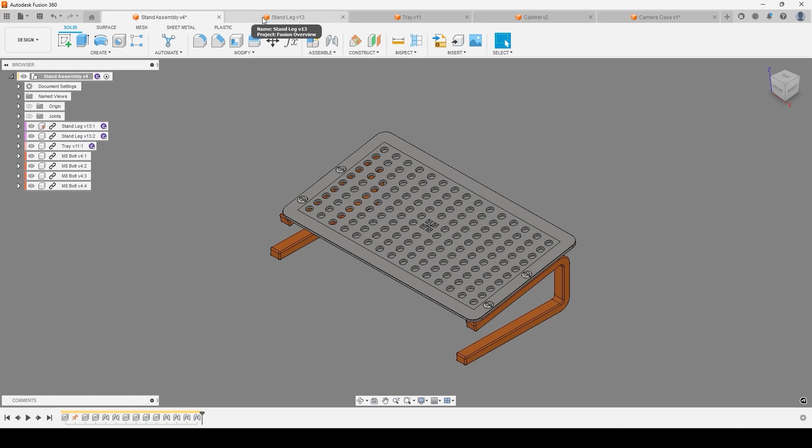So today I'm going to be looking at how we would manufacture each of those individual parts. Looking at the stand leg, this is, in our case, a plastic part. We would potentially want to go and either machine this out of a solid piece of plastic, or we're going to be looking at today the ability to use the additive manufacturing process inside of Fusion 360.

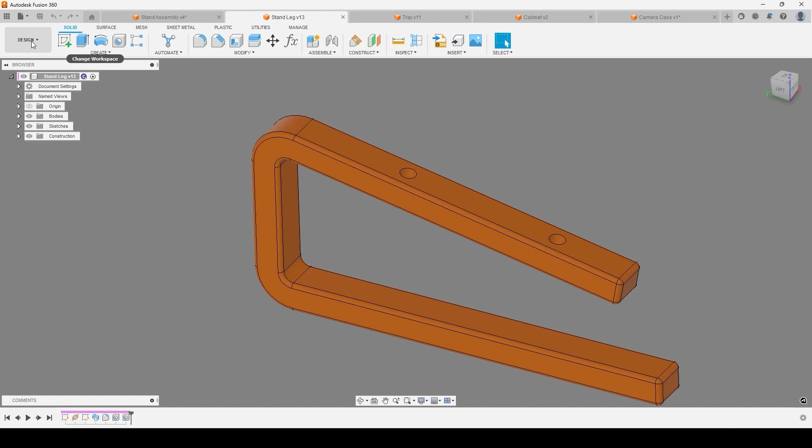to actually 3D print this particular model. So going to the manufacturing environment inside of Fusion 360 is as simple as changing the workspace. We design inside of the design workspace, and we manufacture inside of the manufacturing workspace. So just switching to the manufacturing workspace, you'll notice that my toolbar or ribbon up at the top has new buttons, new tools available to me for this particular workspace.

At the top, we've got milling and turning, which will be our subtractive manufacturing options. We've got additive, which will be the 3D printing. We've also got the ability to do inspection and fabrication as well, which we'll get into a little later on.

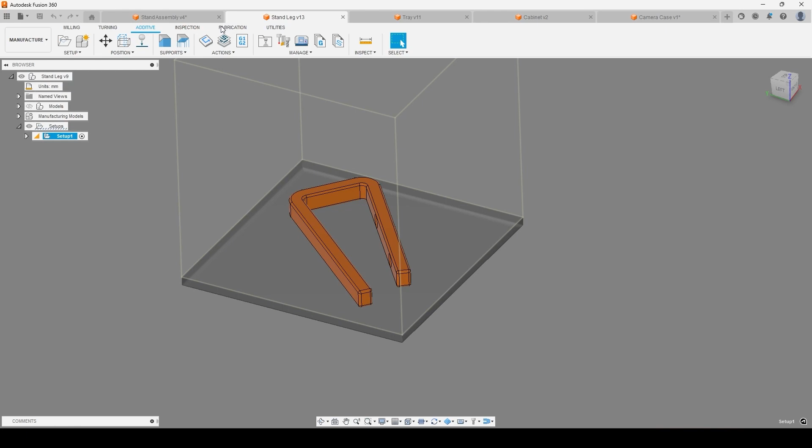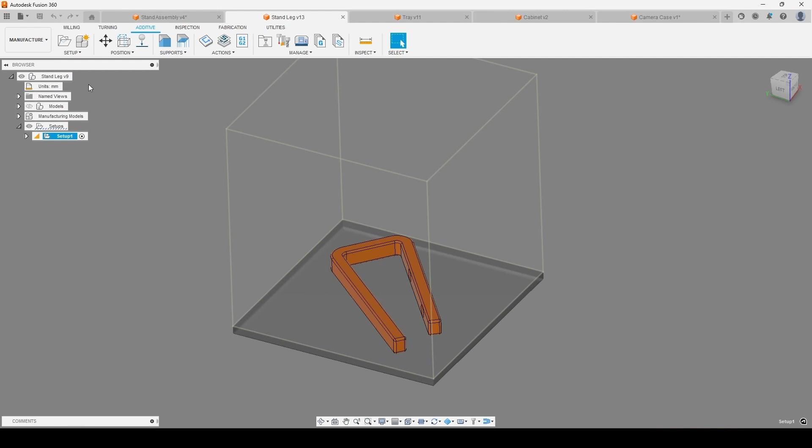So for this particular part, what we would want to do - I've already got a completed version over here, which we can roll back to at a later point. But essentially what we wanted to do inside of Fusion 360 with the simplified interface is we're generally working from left to right in order to go through our either design or manufacture or any other of the workspaces that we have.

So the first thing we want to do is go in and create a setup. This will start to tell Fusion how we're wanting to manufacture this particular component, including the machine that we're wanting to use to print this off.

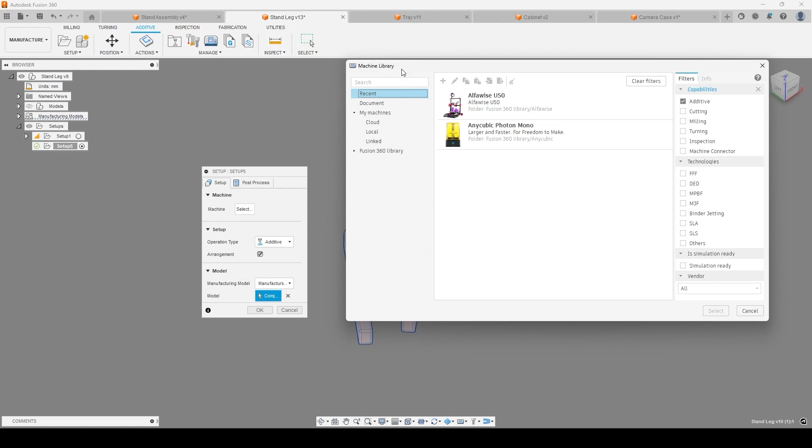Sorry, this has gone onto my other screen. Let me bring it on here. So whichever machine we're wanting to use to print our component, whether it be one that's in our current library or whether it be inside of Fusion 360's library as well, I'll just go for a generic Autodesk one.

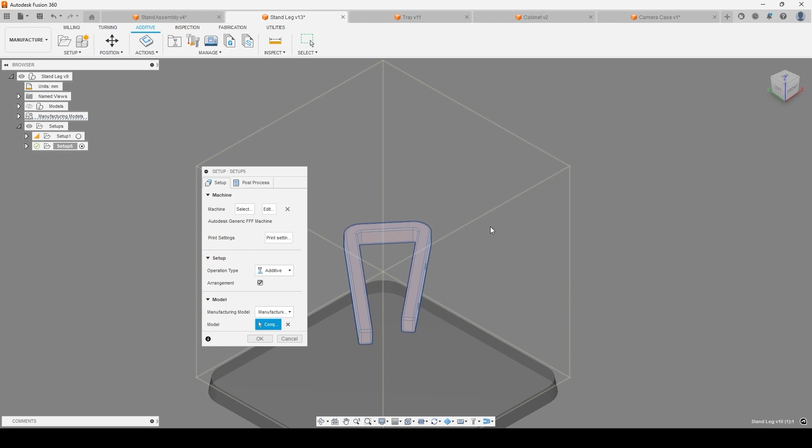I'll go for an FFF on this particular one. This part I've designed as an ABS plastic, but we'll just use this anyway. Go and grab that, okay this, and you can see in the background it's showing me the bed that it's going to be using to print our model.

We can then also choose the print settings. This is where we would go in and adjust exactly how our item is going to print. I can go and edit this if I wanted to, or export this if I wanted to, and adjust exactly how we're wanting to print this, down to the infill, down to the thickness of the outer layer. And all of that is being driven by our print setting library.

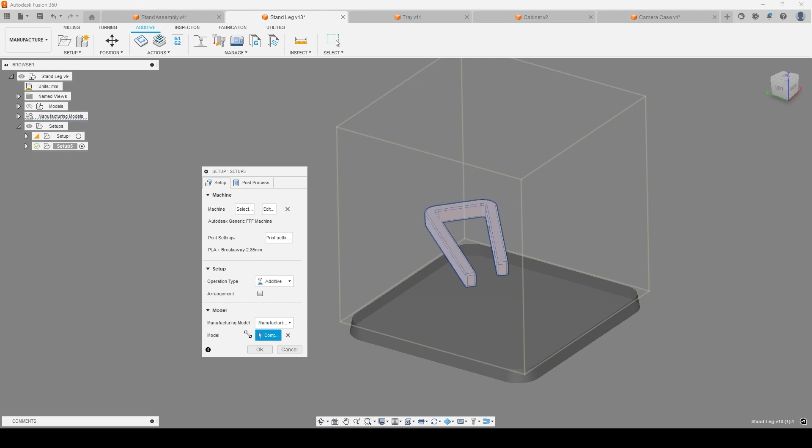We also got the ability to do some arrangement inside of the workspace. So it'll take the volume of the bed, the volume of the area that will be used for printing, and align and orientate our model inside of that area. So we can have it do an automatic arrangement as well. I'm going to leave that unticked for now because I want to adjust that myself and set that later on. Once we're happy with that, we can hit OK, and it will then go and place that in.

You can see at the moment it's highlighting it in red, telling me that it doesn't quite fit inside of my environment or inside of my printing bed. So I can go and position this using the different positioning tools and get it more or less where I'm wanting it to be located.

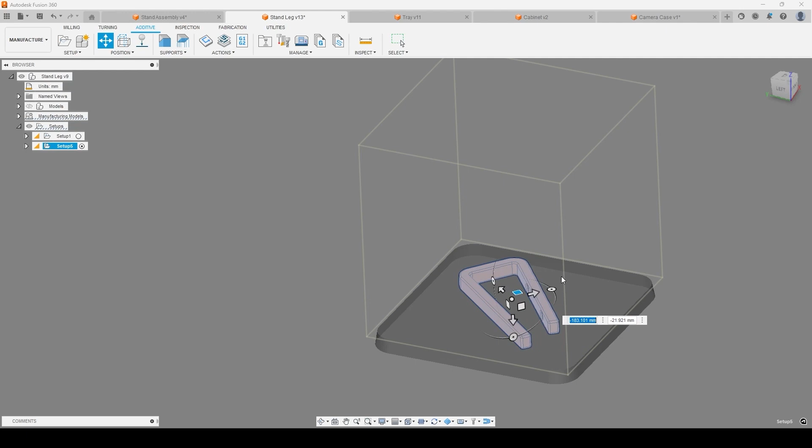Now, because this is going to be having some vertical strain going onto it with the pressure of the laptop or whatever device you're putting onto the stand, I'm going to want to print it in the current orientation so that the layers and the lamination of it is in the correct orientation. So I want to print it on its side as it is currently. So I'm happy with the current orientation of it.

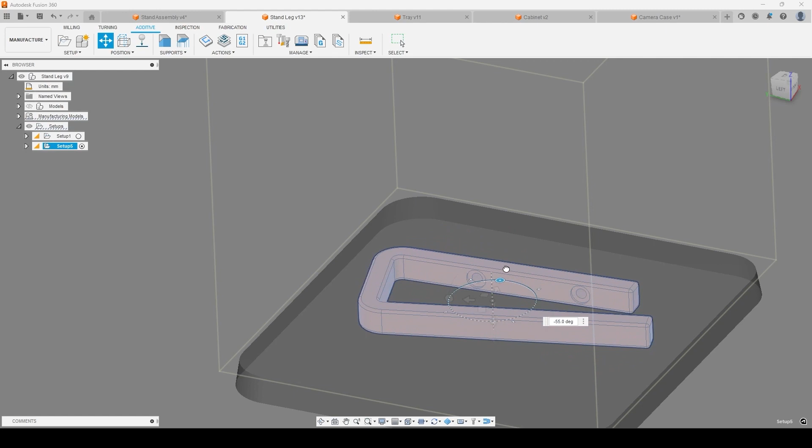Perhaps I could rotate it around as well using the dials on the side over here. If I can grab a grip of it from this angle, you can see we can rotate this in any direction. We can use the arrows to move its positioning, and we can use the squares to rotate it, or move it rather, in a plane, so in two directions at once.

Once we're happy with the positioning of this, we could use other options to analyze the printing themselves, whether we're wanting to minimize the build height to have it as low as possible, or whether we want to ensure that the parts themselves are placed directly onto the bed. We've got the ability to use that inside of the positioning options.

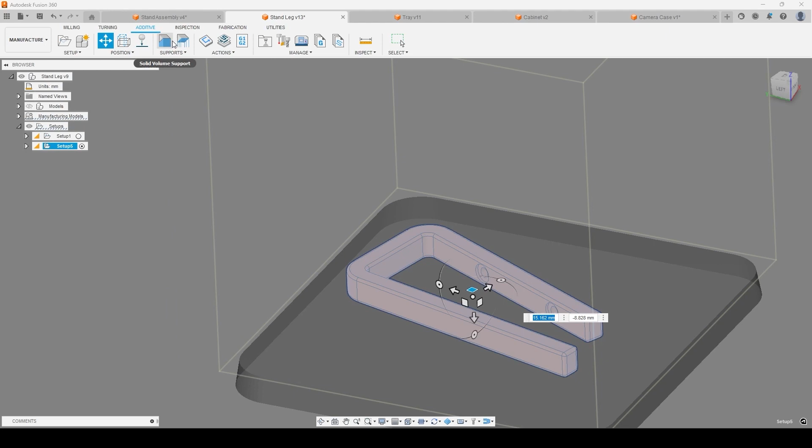We've also got the ability to enable and adjust the supports that are generated for this particular component. So if we did want it ever so slightly up or above the bed itself, just by hitting enter on this and confirming the movement, I can go in and add in some solid volume supports to the bottom of my component to make sure that the entire component is supported during this process.

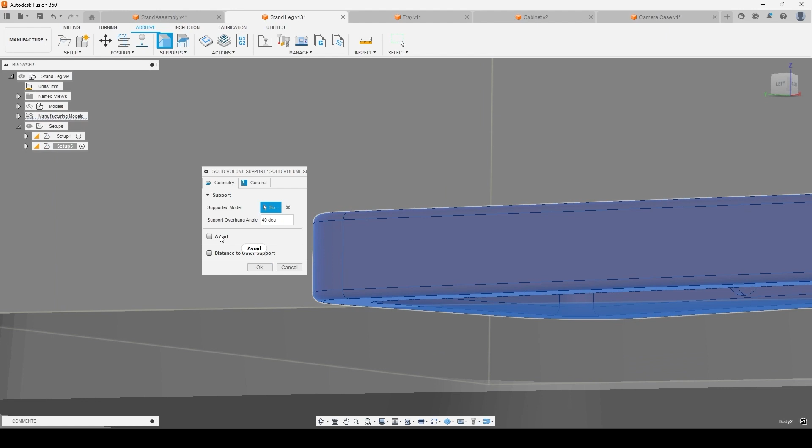We can change the overhang angles. We've got the ability to avoid certain surfaces and ensure that there's a certain distance to other supports as well if we wanted. We've got the ability in the General tab for the volumetric supports to set the top distance and bottom distance of the part as well.

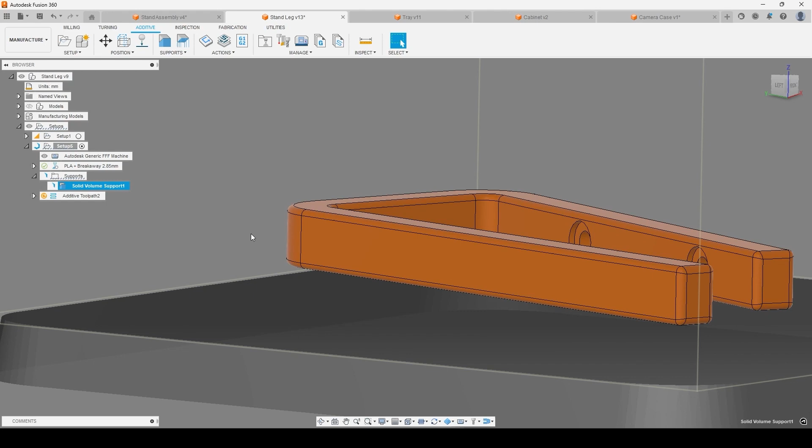That'll then go off and generate that and consider the geometry as part of this process, and then create a solid support underneath the structure, which will then be considered during the printing process.

We've also got the ability, if we wanted to have solid bar supports, and this is if you didn't want the supports themselves to go straight from right below your component into your component, but rather wanted them to come in at a bit of an angle to avoid touching other surfaces.

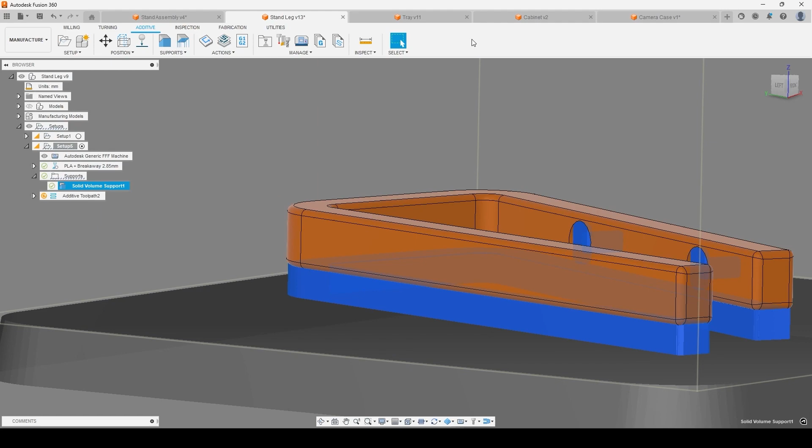If we were to have designed this or wanted this part printed at a 90-degree angle, so it was vertical, we might not want the supports to go through these surfaces if they are a high finished surface, and we want the supports to then go in from the side instead. But in this case, we've got the orientation that I'm wanting.

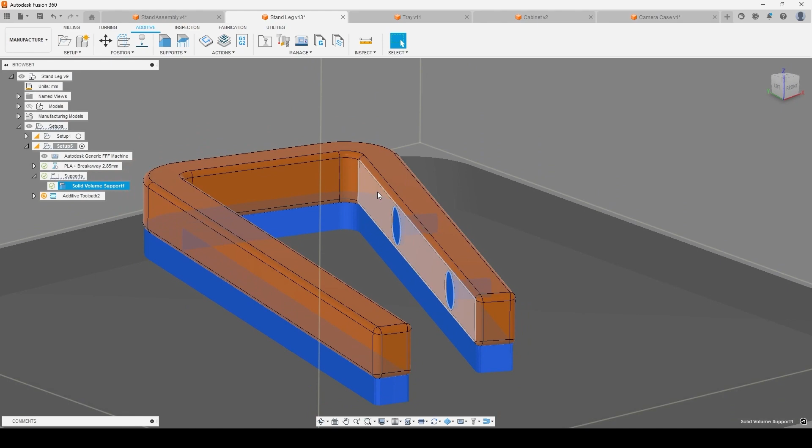Once we're happy with this positioning and the supports that are created as part of this process, we could then go through and generate our toolpath. So I can right click on my additive toolpath here, generate it, and it'll run through the generation process where it's going to calculate layer by layer how it's going to want to print our component.

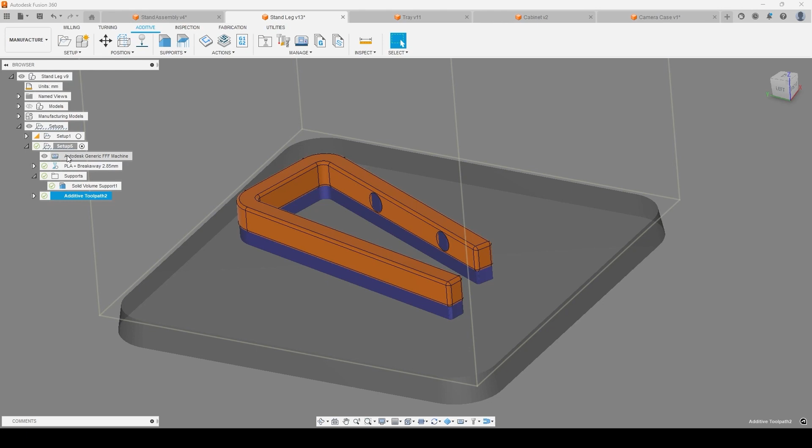I've already got another setup finished and calculated, so I'm going to head over to the active one over here, although it looks like this one has completed in time, so I'm just going to go and stick with this one then. And we've got the ability, after we've generated these, to actually simulate the toolpath. So I can go into the simulation option.

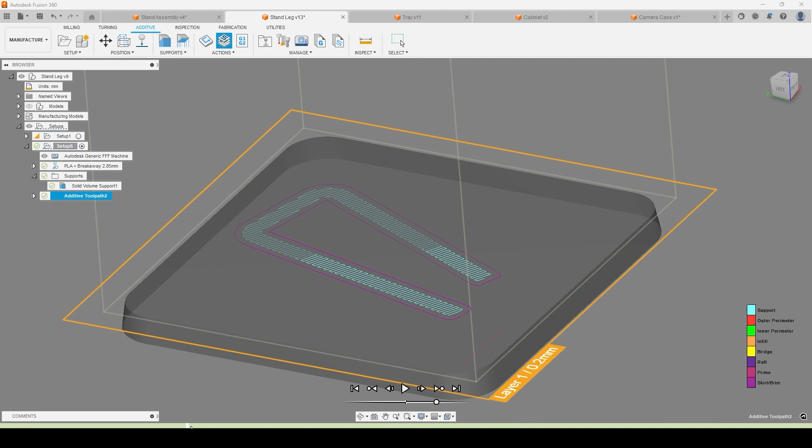From inside our simulation environment, we can go and see layer by layer how this product is going to be printed. We can use the little timeline down at the bottom to skip to certain positions. You can see over here it building the supports.

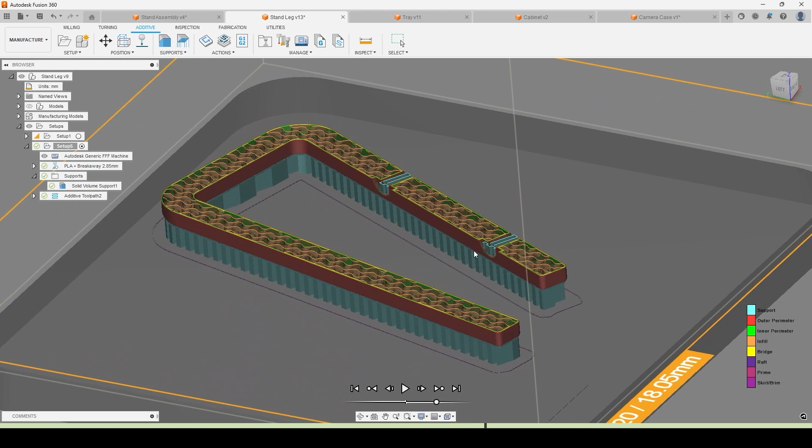Anything highlighted in light blue is a support. Then we can start to go through some of the infill, the outer perimeter, and the inner perimeter of our component. As we go further up, the infill is being populated. Zooming out a little further, we can see the holes placed inside the component are getting some supports generated for them as well.

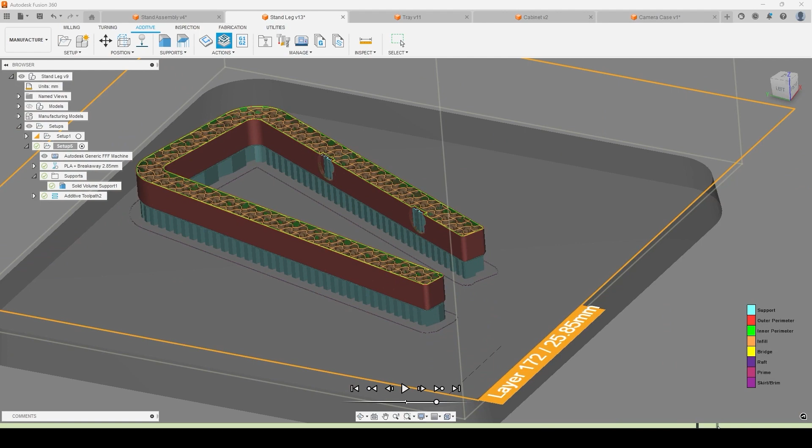As we go all the way through, we get a representation of what it's doing at every single layer. There's a little indicator down at the bottom telling us what layer we're at and how tall the component will be at this particular point in time, all the way right to the end where we've got a finished component, all nicely 3D printed.

The next component we're going to have a look at is the tray that would sit on top of this. For this particular demonstration, I'm going to manufacture this using a CAM process.

So we've got additive manufacturing, which we've used for any 3D printing, but we've also got the ability to use subtractive manufacturing or CAM milling, whether it be turning, milling, or mill turn, all capabilities inside of Fusion. Now this isn't a be-all and end-all demonstration of the capabilities of Fusion, but it's a really good indication of what it's capable of.

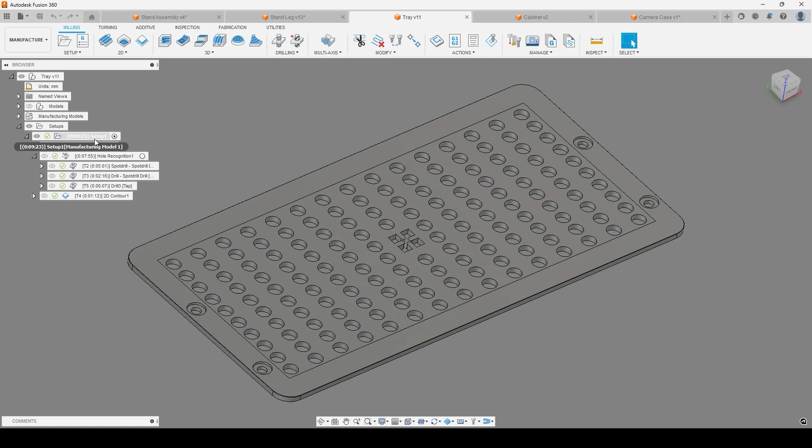So again, using our end-to-end product lifecycle, we've gone from designing inside the design environment to actually going and manufacturing inside our manufacturing environment. We'll switch from the design workspace to the manufacturing workspace to begin creating a finished tool path. I've created my own one here, but I'll go through the process involved in making these as well.

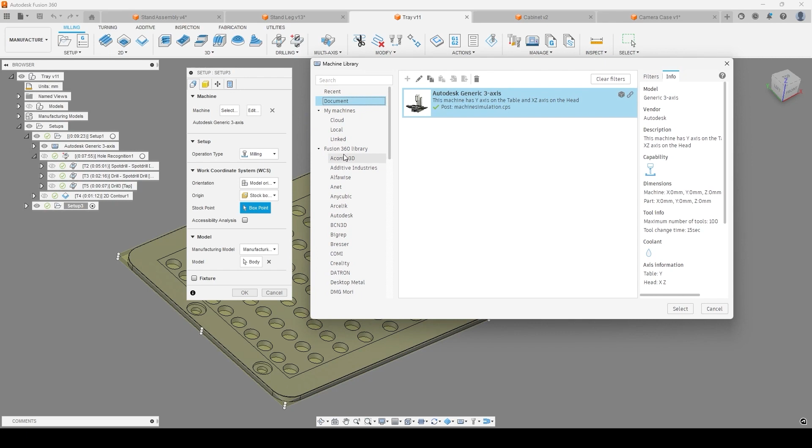Again, we would need to create a setup for this. Inside the setup, we can then assign a machine you're going to use to create this component. I've gone for a generic Autodesk one, but we've got the ability using the select option to go through an entire library of machines we can grab.

If I filter my list just for milling, you can see the various machines we can use. If you're a manufacturer, you might recognize some of the machines you use day to day. We've got the ability to filter via vendor, and you can see a large library of vendors available to us, with Autodesk and the Fusion team always adding to this, which is great to see from a manufacturer's perspective.

There's real engagement between Autodesk and the vendors themselves. They're always continually updating and ensuring we've got the correct posts for our machines. They're also supplying us with beautiful models of the machines, which we can use during the simulation process. Again, I'm going to go with a generic Autodesk one this time.

But we do have the ability to select a machine from this library, and 99% of those machines will also have posts associated with them. So by choosing the correct machine, we then have the correct post associated with it as well, which makes the whole post-processing phase that much easier.

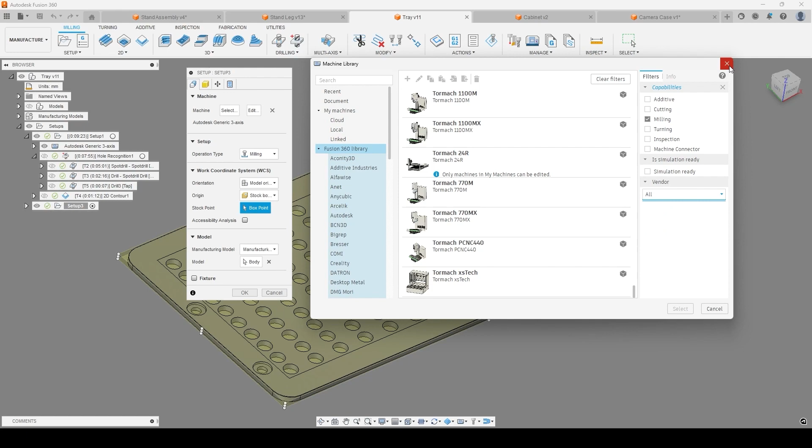If I close this off quickly, you can see similar options to what we had before inside the additive, but with a few slightly varying options here as well. That is the orientation of the model. So if you had designed your model with a different orientation to what you wanted to manufacture it in, we've got the ability to override that orientation.

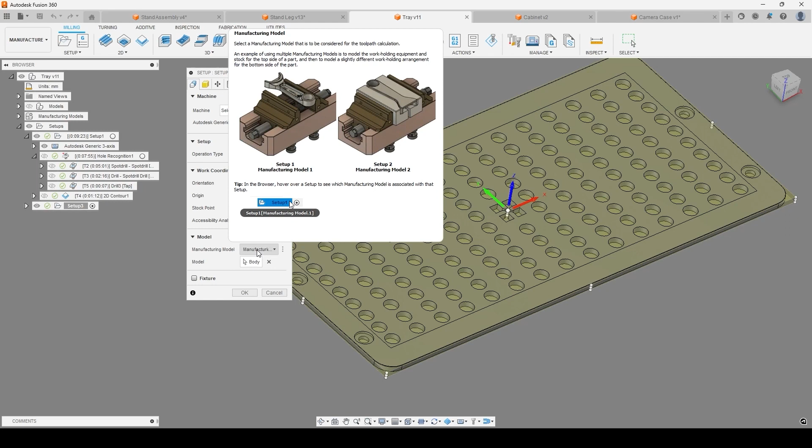We've also got the ability to use different models inside our component, so we can turn certain features on or off during the process. If we just wanted a model without any of the holes on the inside, and just look at the overall perimeter of the part, we've got the ability to do that as well, and have different manufacturing models based on the phase in which we are machining our components.

We then also go and choose the stock. The stock we choose can be either fixed size or relative size box, cylinder, or tube. Depending on the shape and size of the stock you're using, we can come in and grab those from here. If I choose a relative size box, it'll take into consideration the size of my component and add a little bit of stock on either side, top and bottom, then round that up to a nearest value, giving us the stock dimensions down at the bottom as well.

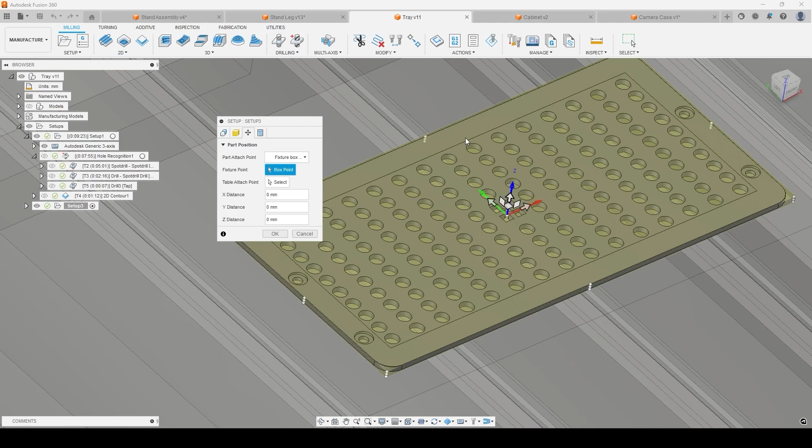If we were using and wanting to simulate this inside of our machine, we could go and choose the positioning of our part inside of the machine that we've selected. This is where picking that machine in the setup makes really good advances in the ability to go and run through the simulation process.

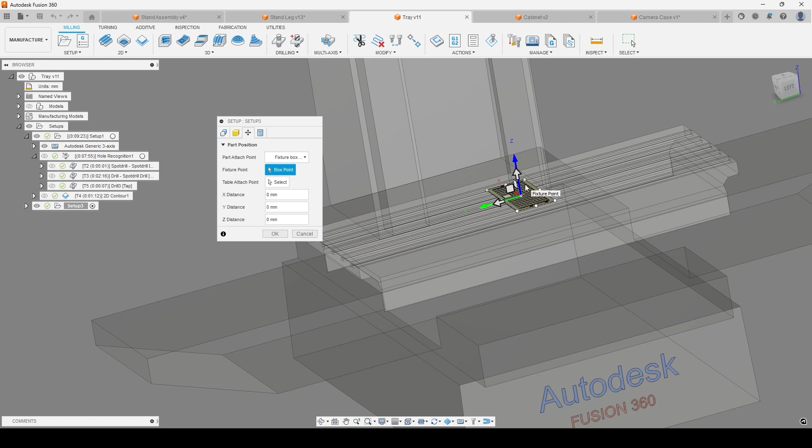If you do have multiple components next to each other inside of your setup, we can then see how they would be in relation to each other and where they fit inside of the overall bed that we're using to manufacture this particular product. We can then move it, and it'll take into consideration the positioning of this in relation to our origin point. I'm not going to adjust any of this. I'm going to leave everything as is on this particular one and just hit OK.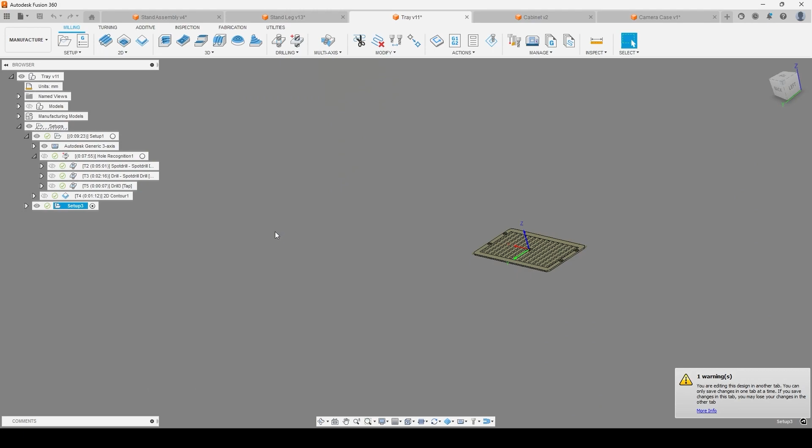Now, once we've got that set, we've got a bit of stock and a component that we wanted to take out of this. So inside of our manufacturing environment, specifically the milling environment, we've got our toolpaths split into 3 separate groups, I suppose technically 4.

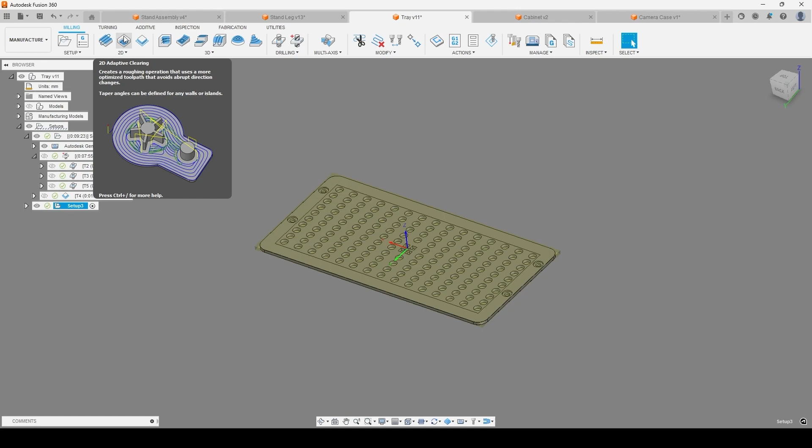We've got our 2D options, and these will require a 2D input of any sort, whether it be a perimeter of your component or a sketch that you've drawn out inside of Fusion 360. We can essentially go and take the geometry from that 2D input, and Fusion will use that to drive the toolpath that we then go and assign.

So if I had to go in and grab a 2D contour, for instance, I can say that I want to choose the 5mm flat, which is a tool I've selected over here, and have it go all the way along the perimeter, which is just a 2D input of the item itself. I could change the tool as well.

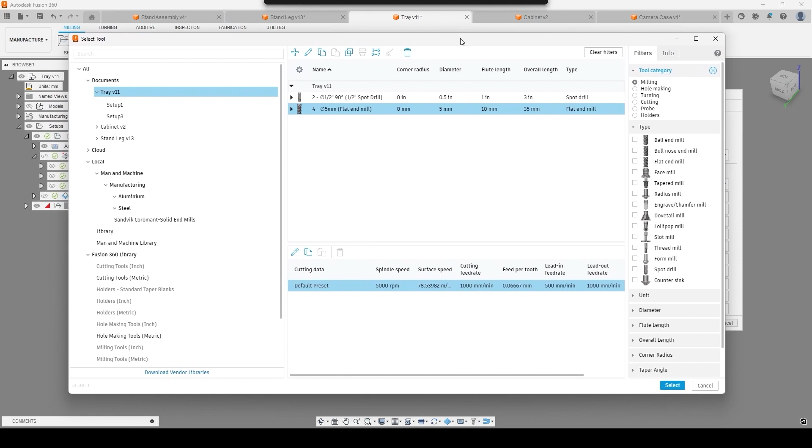We've got an entire tool library available to us in the same way that we have a machine library available to us, either a generic Fusion 360 library, or the ability to create our own local or cloud-based library. So if you have your own library of tools that you want Fusion to always take into consideration when manufacturing your products, we've got the ability to grab those. We've also got the ability to download vendor libraries, so if there's a particular vendor on that list that you want to grab their entire library from, we have the capability to push that straight into Fusion 360.

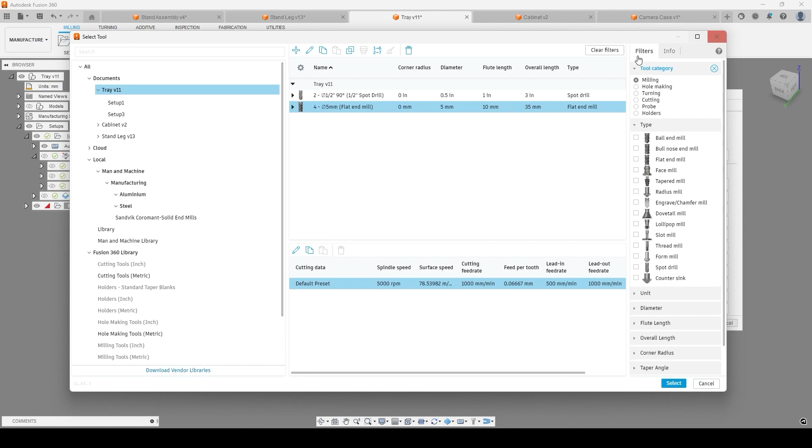I'm just going to choose this 5mm flat end mill as part of this process. You can see it's picked up, based on the tool I've chosen, the various speeds and feeds of this particular tool. To go over to the geometry tab, I've got the ability to choose a 2D representation of what I'm wanting to machine.

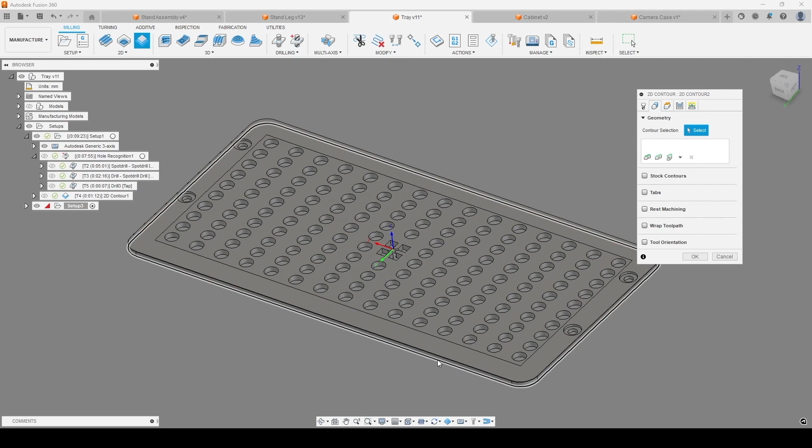So because this is the contour, I choose the outside perimeter of this part, so I can grab that bottom edge over there. As soon as I hit OK on this, it's going to generate a toolpath going all the way around the outside of that particular component based on my selection.

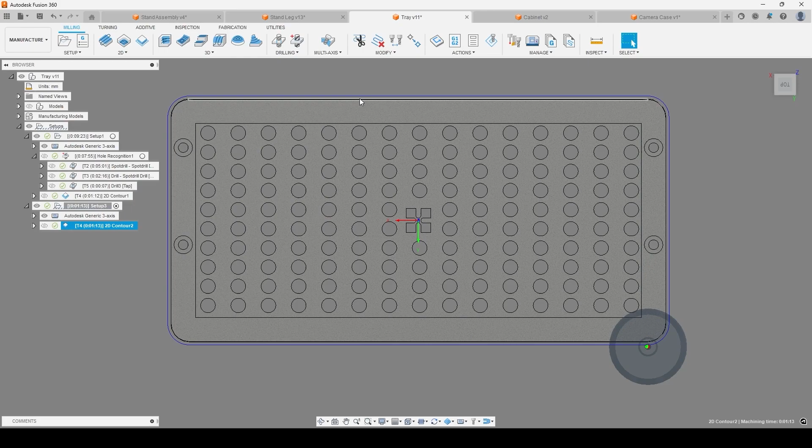We've also got some 3D manufacturing options or 3D strategies available to us. These will take into consideration the overall 3D part. So if you have created anything with slightly more complex geometry that just a normal 2D sketch won't be able to take into consideration, we do have the 3D options.

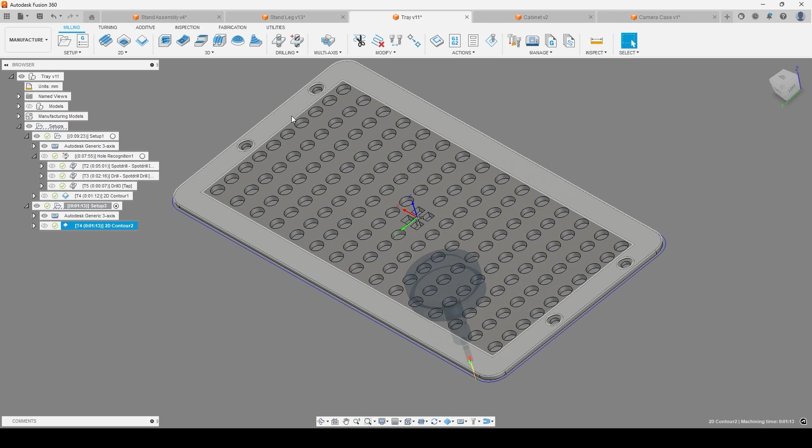As long as you've designed your component in the 3D aspect to the exact representation of the finished product, we've got the ability to tell Fusion that it needs to machine anywhere that isn't the designed part. It'll get rid of any stock that exists outside of our designed component. So those are the 2 main areas inside of the milling environment.

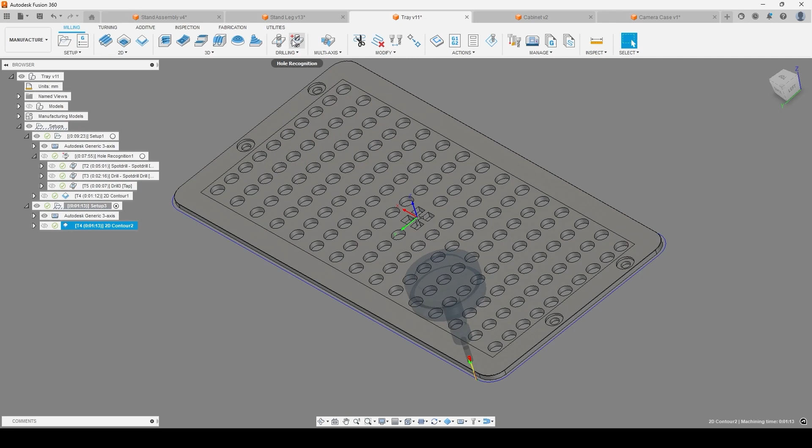We've also got drilling options available to us, either standard drilling, or if we are using the manufacturing extension, we have a hole recognition tool that will automatically go in and find holes of varying sizes for us.

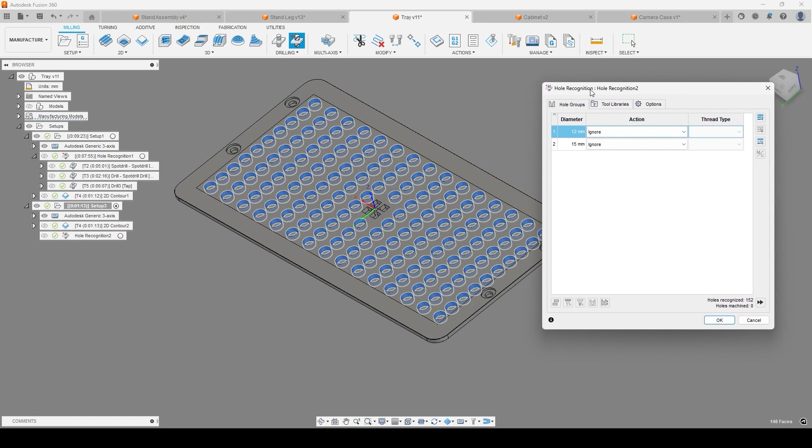So in this case, we've got a fairly simple pattern of the same size, and you can see that inside of our hole recognition toolpath, it's automatically picked up 2 different hole types as well for us.

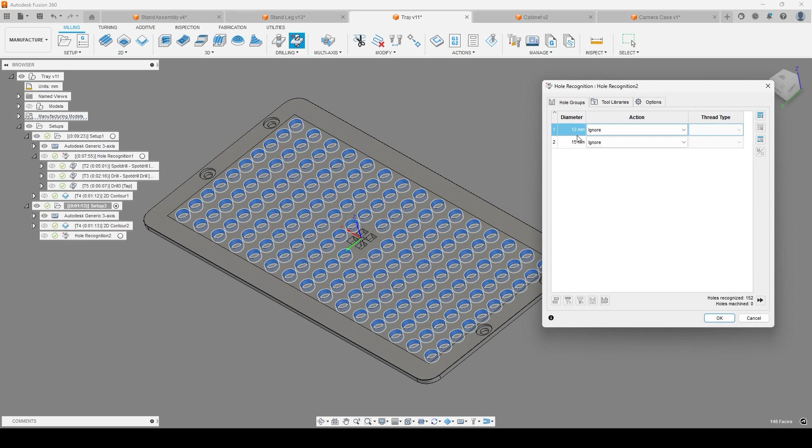As soon as we're happy with that, we can go in and tell it which tools to use. It'll go and look for tools that work best for the holes we've selected. We can create hole groups, telling it to use a different strategy for each individual hole type or diameter, or any group created as part of this process.

And if we were to go and create a spot drill and tap blind hole, we could then tell it what the thread would need to be on that particular item as well.

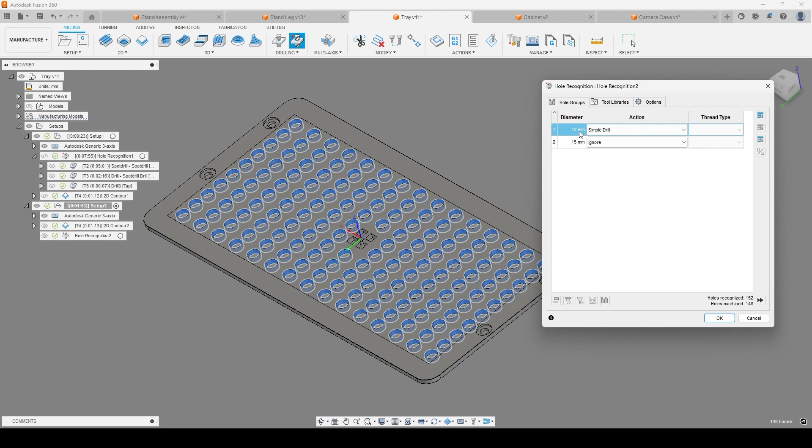But if I go and tell it to do a simple drill on any 12mm hole and the 15mm - I think it's actually the 15mm that I need in this case - and I'm going to tell it to ignore any 12mm in this particular case.

Although it's telling me that there are only 4, so I suspect I've done this the wrong way around. Let me ignore the 15 and go for the 12 - it helps if I know the part that I've designed. There we go. So you can see at the bottom right, the holes that have been recognized and the holes that are going to be machined are 148. It's already picked them up nice and quickly for us there.

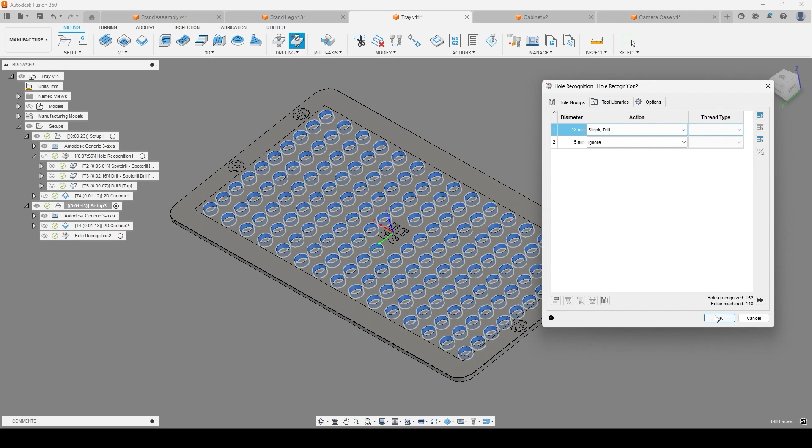As soon as I hit OK, it's going to run through and, using the options that we've given it, go and create a toolpath for every single one of those holes that it has recognized inside of this component, really making that design process and the manufacturing process much easier by going right the way through our product.

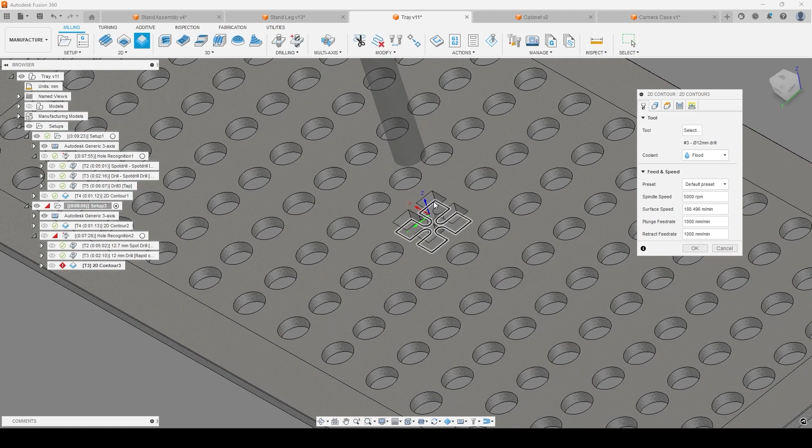Now we could go in again and create a 2D contour on the inside to get this beautiful Man and Machine logo cut out of the component, and use any other machining strategies on the holes as well. Really go to town with adding in the strategies, making sure that we're getting as much of the component in as possible.

I mentioned the manufacturing extension earlier, which gives us the capability to use this hole recognition tool. We've also got other options available inside the manufacturing extension, including the ability to trim toolpaths and delete passes, and there really is a lot of great additional functionality we can use inside of the manufacturing extension.

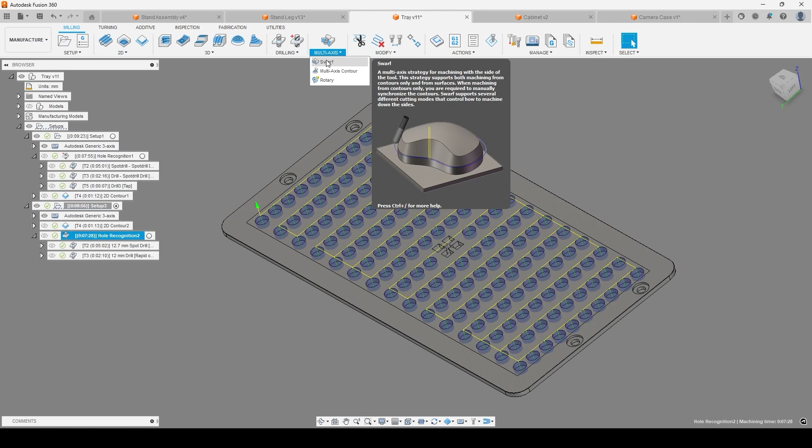The other big portion it includes is the ability to use multi-axis strategies. So anytime we are doing anything more than 3+2 strategies, if we're using 4-axis or 5-axis, we've got the ability to make use of the full capabilities of our machines using the multi-axis strategies.

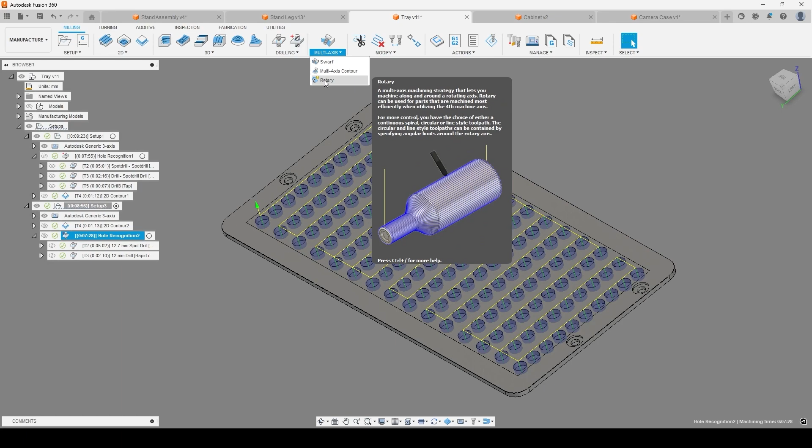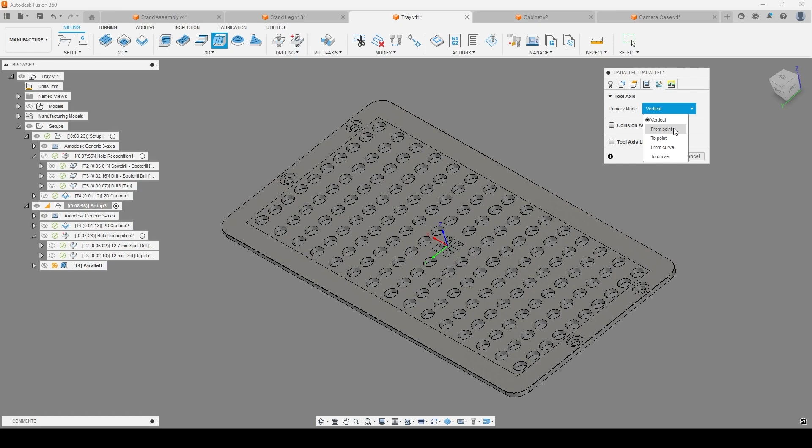Not only do we have swarfing, multi-axis contouring, and rotary, but inside our 3D strategies, when machining fairly complex geometry, each of these strategies has the ability to enable multi-axis functionality. So we can tell Fusion to use a certain primary alignment or angle for our spindle during a particular strategy, or tell it to align to or from a particular point, or a curve, inside our environment.

If I go through and quickly activate my original setup here, it's got a bit more work to it. We've got the hole recognition tool, which has gone in and done a few drills, as well as the contouring over there. Let me cancel out of here very quickly and just activate this one.

We can then go and run through a simulation of this environment as well, or these toolpaths as a whole. Similar to what we've done inside the additive environment, we can do the same inside our subtractive manufacturing. So grabbing the entire setup over here, including all of the toolpaths, we can actually go into our actions panel and just say we want to simulate the overall process.

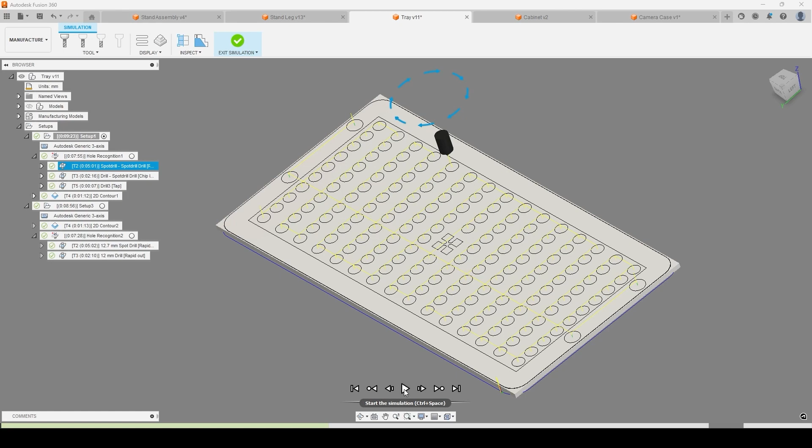You can see the simulation environment it gives is fairly similar to what we had inside the additive. We've got the ability to play through this, or we can grab the timeline down at the bottom and watch it go through every single individual hole inside our part, machining hole by hole, and then run around the outside for the final contouring finish.

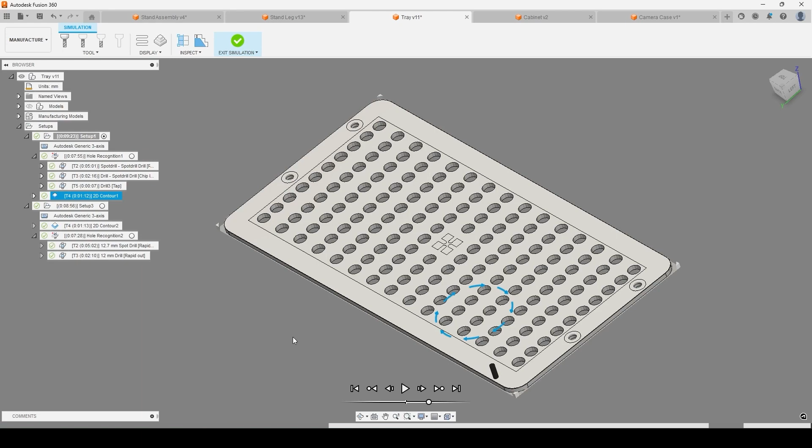We've got the ability to change how this is displayed, so whether we're wanting the stock displayed or not, whether we're wanting the toolpaths displayed during this time or not as well, and how much of the tool and other environments we want to look at. We've got the ability to do some section analysis during the simulation process and a few other tools and tricks available as well - a really great way, before we even begin manufacturing, to make sure we are getting as much of the material out as we need during the process.

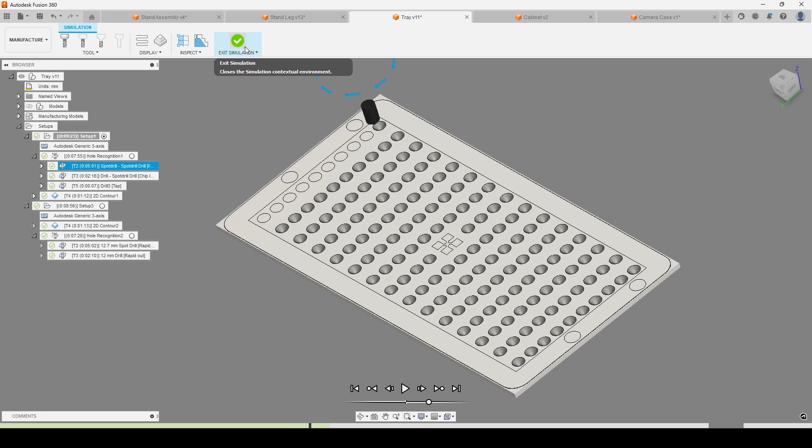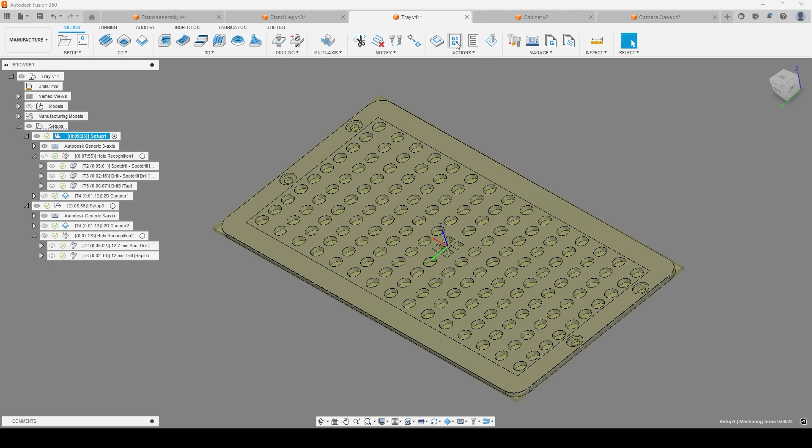Once we've gone through the process and are happy with the toolpaths we've generated, we can post these out. As mentioned earlier, inside our setup we've already told Fusion which machines we're using, and those machines each have their own posts associated to them. So when we post-process this, we're essentially converting all the toolpaths Fusion has created into the relevant G-code.

In the post-process options, we can use the machine from the configuration, or choose a separate post if needed. We can give this a number, a file name, add commenting, and tell it where to post this to, whether a local drive, network drive, or wherever we want. We can also keep this saved as a file inside Fusion 360 if needed, pointing to a team folder.

So if you're collaborating with other designers, and perhaps your machinists are in another workspace or even another site, you've got the ability to post this to a central database where your machinist can go and grab it from.

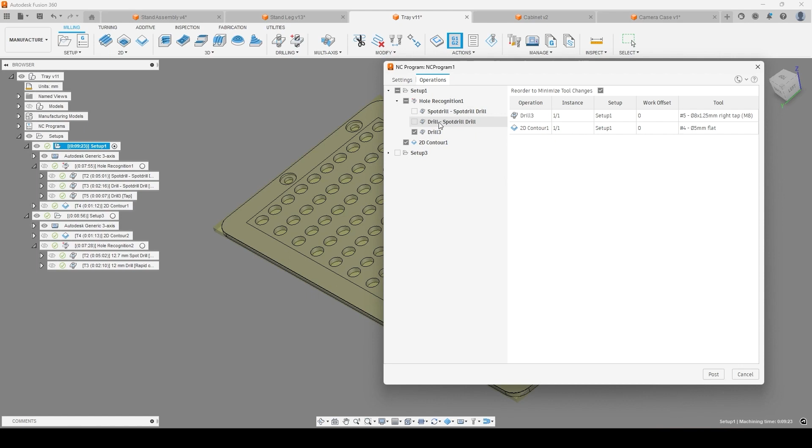In the Operations tab, we've got the ability to disable certain toolpaths if needed. So if we didn't want to use any of the drill operations, particularly the spot drill, and just wanted to drill all the way through without spotting, we can disable those as part of this process. Once we're happy with that, we post this out and it generates the code based on the post processor.

The last environment I want to take you through is the ability we have to create fabrication models. If I go and grab this model over here, it's not related to our stand assembly, but with this particular item we've got a few panels of the same size that have created this cabinet.

Now, this cabinet could have been created in another program and brought into Fusion 360, or designed inside Fusion 360, and we want to create a fabrication model of this, where we want to flat pack this, or create a machining profile to be able to laser cut out the profiles, the parts themselves in this case. What this will need is these individual items to be solids or components inside Fusion 360.

Once they are, we've got the ability to tell Fusion the alignment we want for our particular component. So knowing what Fusion knows about the items and the timber sheets we might have available, we can go into our utilities at this point and decide how we're wanting to nest these components.

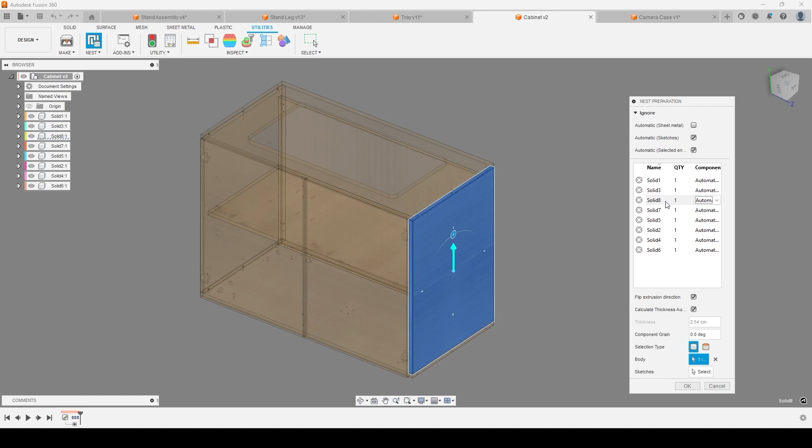It's automatically going to go grab sketches and or selected entities as well. Each of these individual items are one of the components that exist inside our assembly, and from this we can tell it various things, whether we want to change the extrusion direction, whether we want to calculate the thickness automatically, which it's done in this case. Otherwise we can tell it a thickness associated to this particular item if it isn't the same thickness as designed in this process.

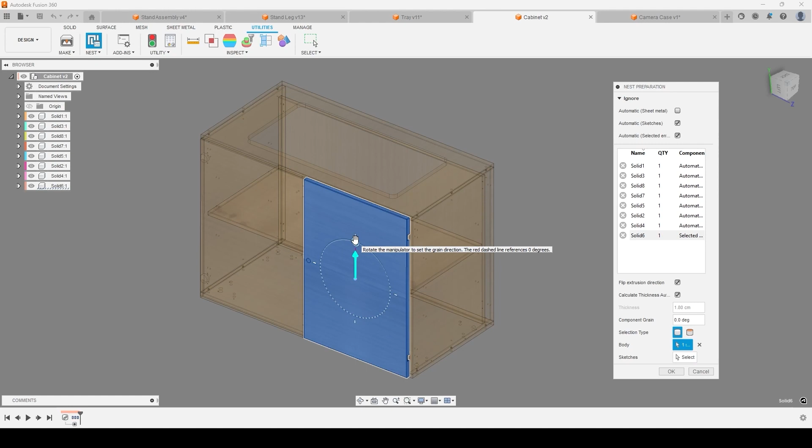We've also got the ability at any point to go and choose the direction of the grain that might be required. So if we want to ensure it is enduring certain vertical or horizontal loads, we've got the ability to change the alignment to make sure the grain best aligns with the particular item, and we can choose that for every single solid in our assembly. Once we're happy with that, we can then go over to the manufacturing environment for this particular item.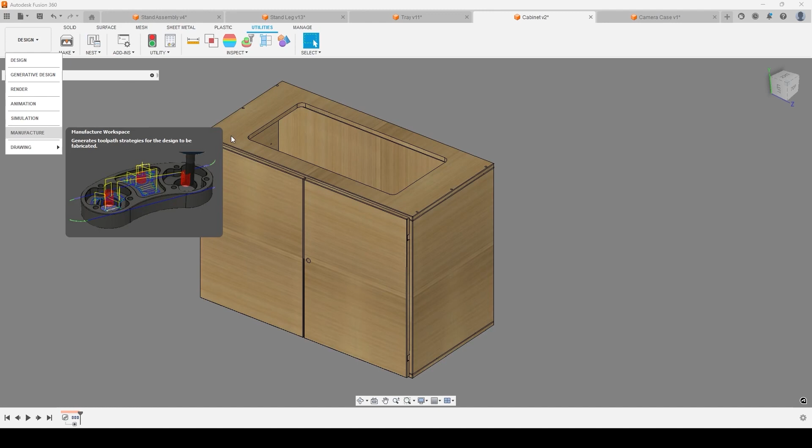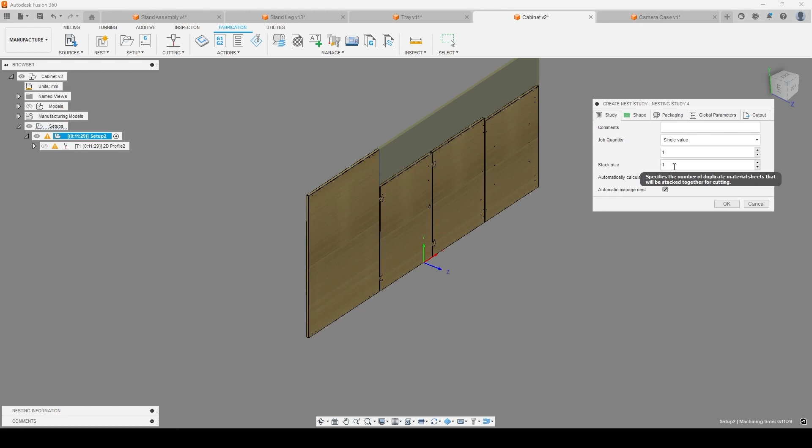Rather than using the milling, additive, or turning environment, we want to go and grab the fabrication environment. This one's already created one for us, but if we wanted to use a new one, we've got the ability to create a new nest study as part of this process. So we can go in, add any comments, say how many jobs we want to produce, how many stacks we want, or what the stack size is.

We've also got the ability to input inside our library the various source sizes, so different sizes of panels that we can tell Fusion to look for and calculate which are best for the components we're wanting to create. And then we can tell it how we're wanting to package these as well.

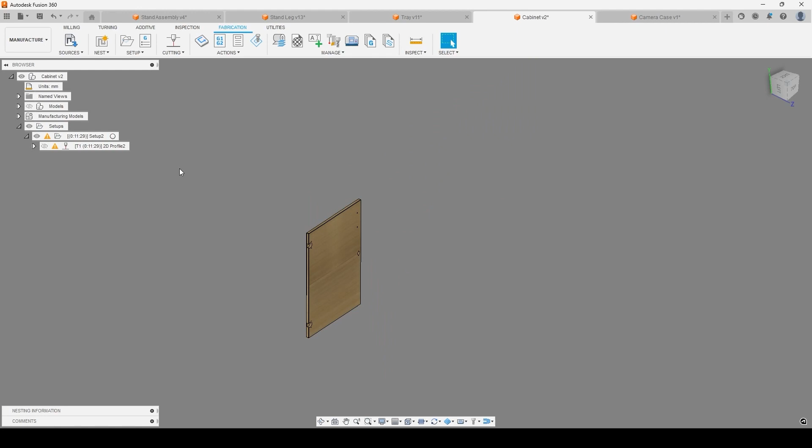Once we've got all of those inputs set, it's going to take all of the components that exist inside our design environment, all of the components from the assembly, and generate a setup and model orientation for us on those. If I activate this now, you'll see it's gone and created multiple manufacturing models, each for individual sheets, showing how these individual sheets will be nested as part of the process.

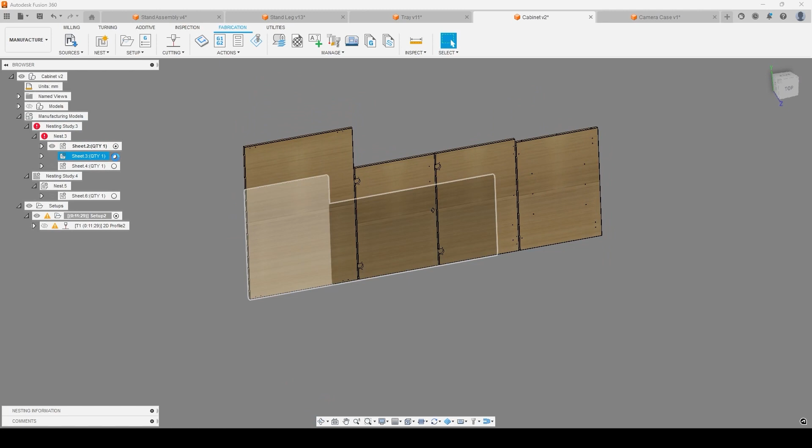We can then take each one of these sheets and create toolpaths and cutting paths to manufacture this particular product. You can see we've got nest 3 over here, and the other study I just created now would have been sheet 6, but that's because I only selected the one item mistakenly. So we've got our study over here, which will allow us to grab each of these individual components.

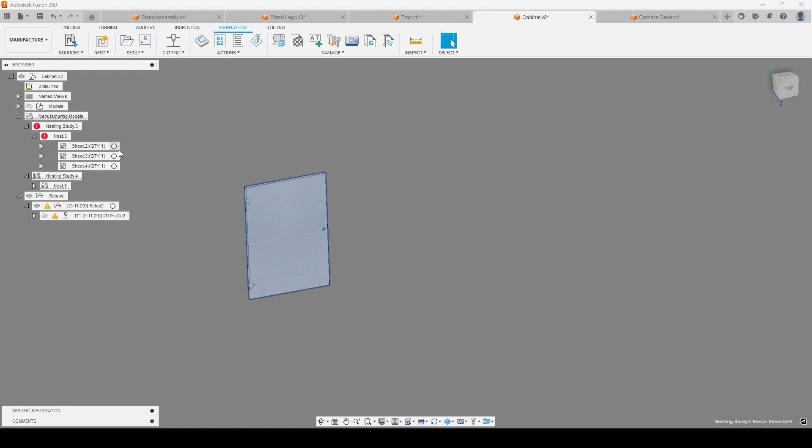If we wanted to, we could then go again through the process of creating a setup for that. Again, I've created my own one over here, so I'm just going to grab that. Inside of the setup, we can choose which nesting study we're using as part of the setup, basically choosing different manufacturing models.

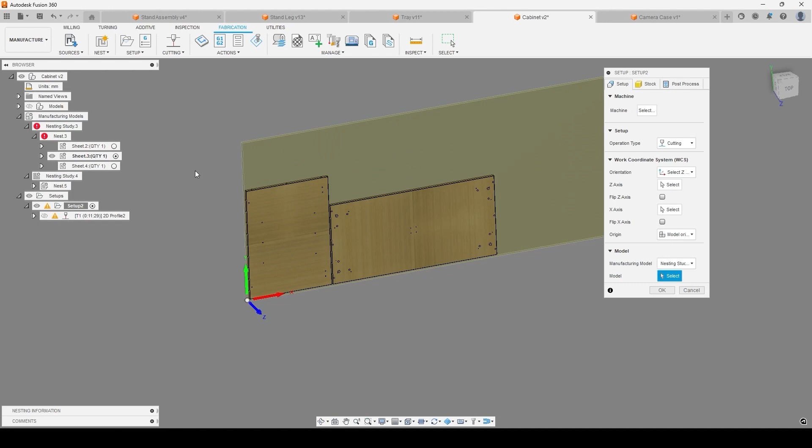You can see how it then goes through and selects those ones and adds them into the environment for us. Once we've decided on the one we wanted to use as part of the study, we can go and hit OK on there. Ignore the warnings - famous last words. There we go. And we've got the ability to create a 2D profile that is then cut out as part of this process.

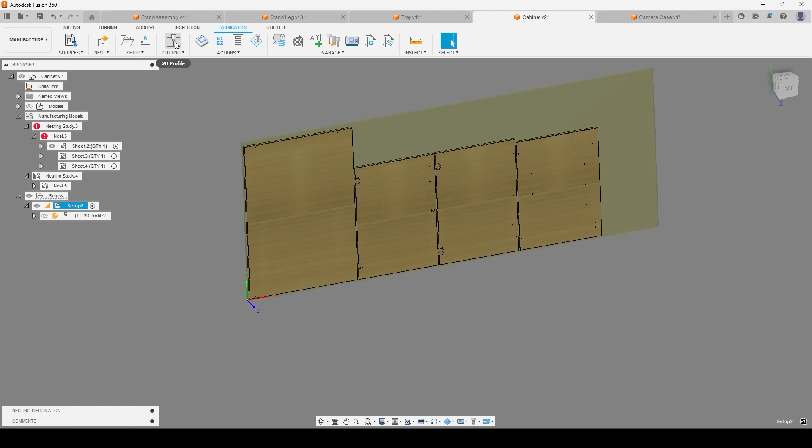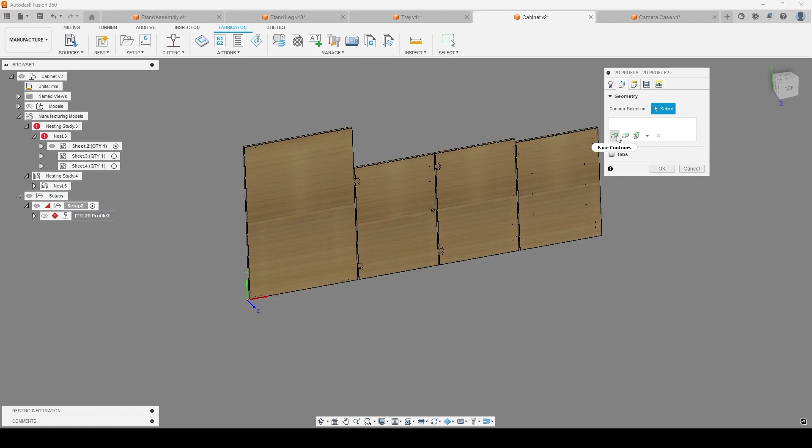It's simply a case of adding a strategy to this, telling it which profiles we're wanting to use. If I just right click and generate this, it's going to calculate the toolpath required for this particular component. Let me edit this one and reselect the geometry. So we can go in and grab the contours of a particular component, grab each of those faces. This one has some fairly complex geometry, as you can see over here.

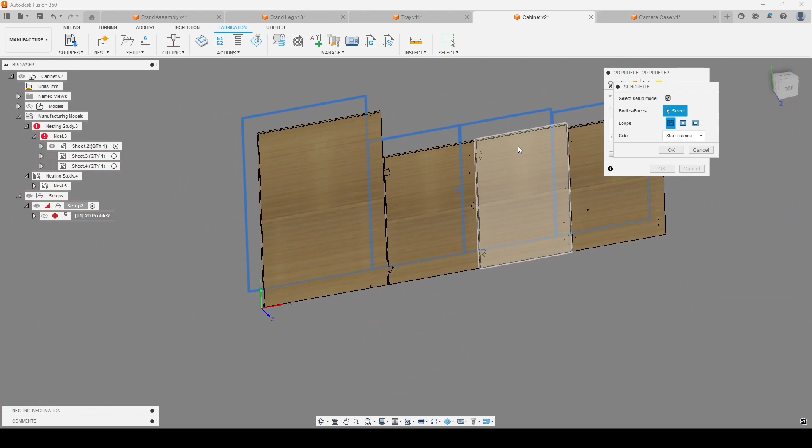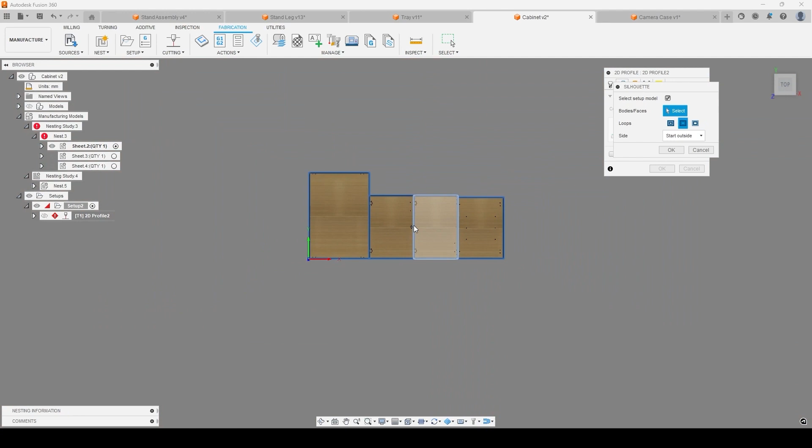So what we might want to do instead is go and grab our silhouettes of the component. You can see all of a sudden it has grabbed the silhouettes of those. We can either say we want all of the loops, which will include the holes - so if you did have certain holes you wanted manufactured, in this case we want that one selected. Otherwise we can say only the outer loops, which will ignore any inner loops, or only the inner loops. So really great selection process available to us.

As soon as I hit OK on there now, OK once more, it's going to calculate the toolpath required for that, and it will then cut out the components. If we still wanted to, we could go in and add any other toolpaths to this - if we wanted to go into the milling environment and add milling to machine out any of the other areas as well, but you would likely want that as a separate operation. This is just using a laser cutter.

Again, once we're happy with all of this, we've got the ability to go and post this out as well if we ever needed to, using our post-processing, and we can push this out as a final finished G code for our machine.

And that's essentially an overview of the manufacturing capabilities inside of Fusion 360. We do have a few other environments available as well, including turning, as well as inspection, which Fusion are continually adding capabilities to as well. But really hope that this has been a good overview for you if you are considering looking at Fusion 360.